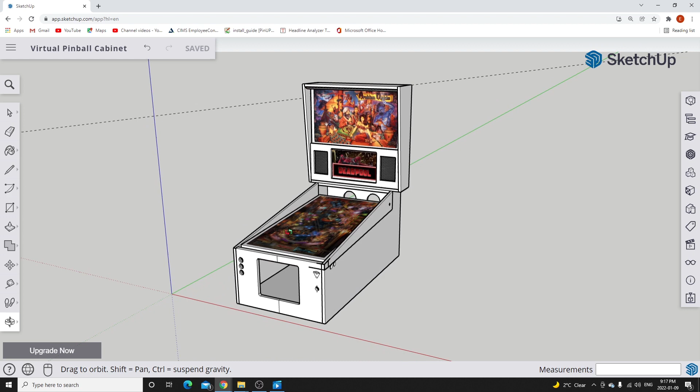Before I get into showing how to draw this stuff, I thought it would be important to talk about the design constraints you'll have for your own custom build. There's a lot you need to know before you even start drawing, such as how many monitors you'll have, whether you'll go with 3 or 2, a full DMD or a traditional 4:1 DMD, whether it'll look like a certain type of cabinet, standard, wide body, or custom like mine, and which parts you're using. Let's go through them one by one, then I'll show you how to draw some parts using SketchUp.

The very first thing you need to figure out is what type of cabinet you're going to make. Are you sticking to a traditional standard or wide body size Williams cabinet? If so, you'll have to search out monitors that fit those exact dimensions. A pro is that all the parts will be an exact fit since you've made it to the traditional dimensions the parts were designed for.

Now if you go with your own custom dimensions, like I did with my custom wide body, you aren't restricted by the monitors, but some parts still have to be a certain size, so keep that in mind. I went with a bigger, wider TV, which has pros and cons. One con is it makes my cabinet about 1 inch wider than it should be, so the wide body lockdown bars don't fit my design, and I'll have to make a custom one.

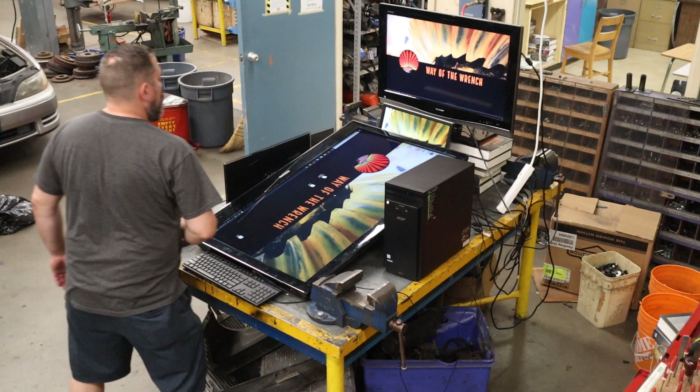Now once you figure out your TVs and you've got some TVs with good specs that you've already tested and they're going to work great for you, the next thing you need to do is figure out the actual dimensions of these monitors. In most cases these don't look great by just throwing the monitor in and being done. You kind of have to decase these things so they're a little bit skinnier, a little bit lighter as well, because some of these are pretty heavy.

So once you take them apart, get a tape measure and write down your length, height, and width. I'd measure from the front of the screen to the bottom where the VESA mounts are, so you know where you're going to have to mount stuff. You'll do that with all three monitors, and once you have those dimensions, you can draw a fake little monitor. It's basically just a big rectangle with some thickness, and that'll help you figure out how wide your cabinet needs to be and how long it needs to be, etc.

Now one of the things for the playfield monitor that's really going to affect some design stuff is whether you have a long enough monitor to fill in the playfield area. I know some people, especially when they're trying to stick to a standard size or a wide body cabinet, their limitations in the size of the monitor have reduced the length of it. So there's actually a bunch of inches here that they have to try to make up with something.

So what a lot of people do is they have kind of like a fake apron, which isn't the playfield and isn't the lock bar. It's just an area that you can kind of customize and do whatever you want.

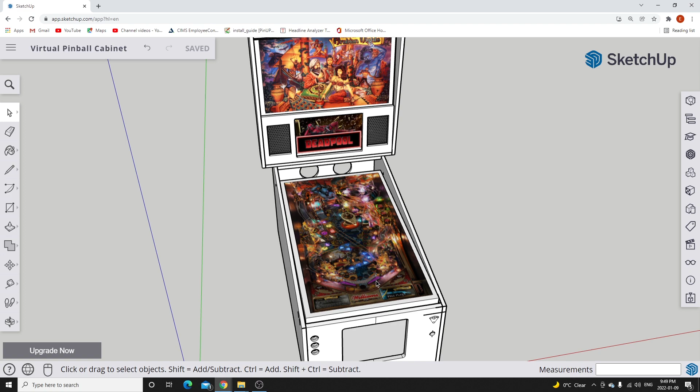But there is another kind of piece that's required to fill in the gap. One of the big reasons I chose my 46-inch TV is because of the length of it. I don't actually have to do an apron. I'm going to do a custom 3-inch wide lockdown bar that's going to cover up right to the edge of the monitor, so it'll be perfect. Literally from here to there is 3 inches, so it's going to mesh perfectly. If you look at the back here, it's pretty much where it needs to be, and there's room for a board for my LED matrix as well. That's going to work out perfect.

While you're at it, don't just get the external dimensions of your decased monitor. I would also try to get the dimensions of the actual display itself. Whether you plug it in and measure it that way, or you don't actually have to plug it in—if you look carefully, you can see where the edges of the actual display are and get those as well. That way in SketchUp, you can draw an additional box and insert an image, and it'll give you a better idea of what this will look like in your cabinet. So you can see on mine, I've got roughly an inch border around this monitor, which will help me figure out how it's going to sit with other boards.

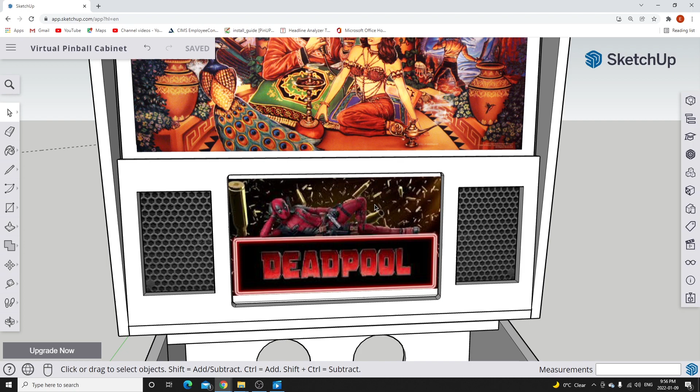Now, for your DMD screen, same thing. You're going to want to figure out what your cutout size is for your speaker panel. You don't really want blank black images where your border is on your screen, so you're going to want to measure the display size so your cutout looks more exact. And then on my Playfield, same thing—you can see there's roughly an inch border around this monitor. So keep that in mind, and that way when you put an image in, you can get a better view of what it will look like.

Now, for most of your dimensions, I'd say the front surface of your monitor to your VESA mount for your back glass and your DMD is going to be good enough for the boxed rectangle you're going to make in SketchUp. However, for your Playfield, I would get some more dimensions here, and I'm going to show you why.

So if I grab my monitor here and go to my move tool, I'm just going to move it by the corner, straight up and out of the way so I can see it with you. Now I've just moved the Playfield monitor up and out of the way so we can actually look at it from underneath. The reason why is I wanted to show what other dimensions you might need to know off of the actual Playfield monitor.

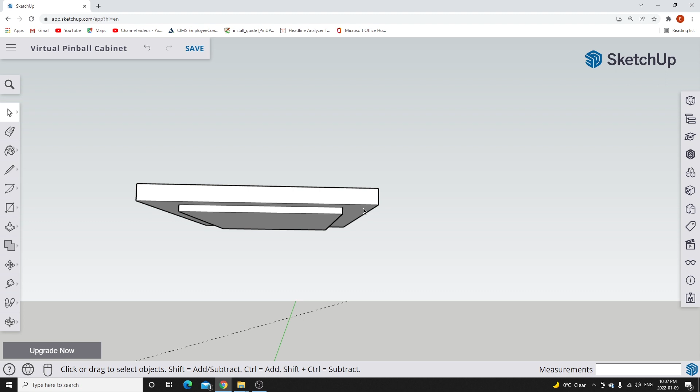Now what you're seeing here is a kind of boss that sticks out deeper. This dimension here is from the front of the monitor right to the VESA mount—this is where it's going to have to mount to something. But on my monitor, after I decased it, it was quite a lot thinner around the edges of the Playfield monitor. The reason I drew this into SketchUp is the next problem you'll have is the backside of the monitor, especially along the edges and by the front of the cabinet, taking up space where other parts are trying to be—your flipper buttons, your MagnaSave buttons, and your actual plunger. So I'd recommend you get these dimensions figured out on your real monitor so you can draw them accurately in SketchUp as well.

Now, it doesn't have to be super accurate—just measure all the way around the monitor and measure off the thickest part sticking out in these areas. The parts that are going to interfere with your monitor placement for your Playfield are your actual flipper buttons and your MagnaSave buttons, because on the inside of the cabinet you have those leaf switches and wiring, so that can't take up the same space. And on the front side of the cabinet, you have your plunger, which extends inside about 5 inches at an angle of about 5 degrees or so.

So you can't have the monitor in those spots. Now, there's a couple solutions to this. First, you could take the Playfield monitor and stick it all the way up at the top and keep it parallel with the top of the cabinet. I've seen a bunch of people do that. I'm not a fan of that, I kind of think it tends to make it look more like just a video game rather than a monitor. But if you do that, you will most likely clear all of these parts here and have no problems with the placement.

Now, when I designed mine, I did want to have it so that you had to look down through the glass and it looked like it was more in the right spot. So I was ultimately designing the top of the Playfield to be 1 inch down at the front and about 6 inches down at the back. However, that literally put it right in the middle of all of these parts, so that wasn't going to work for me. If this is your case, there are a couple things you could do.

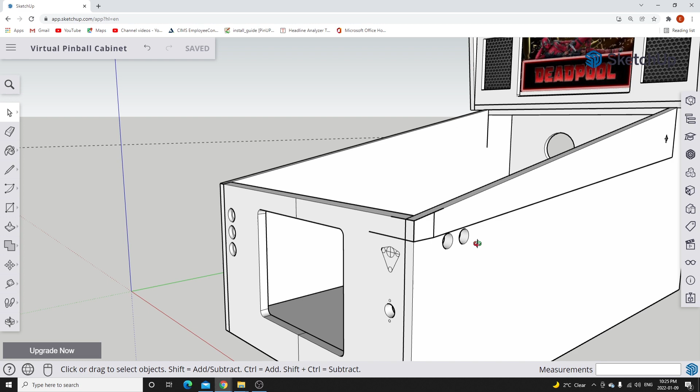However, in my case, I had no problem extending it down about 1/4 inch further. I measured with my hands over the edge of a table, much like it would be on the end of a cabinet, and it would actually work even better for my hands specifically. So I did move them down 1/4 inch, and that allowed me to modify the position of my Playfield monitor so it still kind of has the feel of what I was looking for, just a little bit different.

So what I ended up going with is the front of the Playfield monitor sitting right at the top of the cabinet at the front, and then the back is going to be 4 inches down. So I still get that realistic look with the glass and the Playfield screen being down a little bit, so it should look a lot better.

Now, what I did is I drew this temporarily with some lines on the outside of the cabinet so I could double check it was going to clear all my parts. So this dimension here is the thinner width of the TV, or thickness of the TV, which was 1.75 inches. So I drew the bottom of the monitor and then to where it would be at the back. And you can see that it is close.

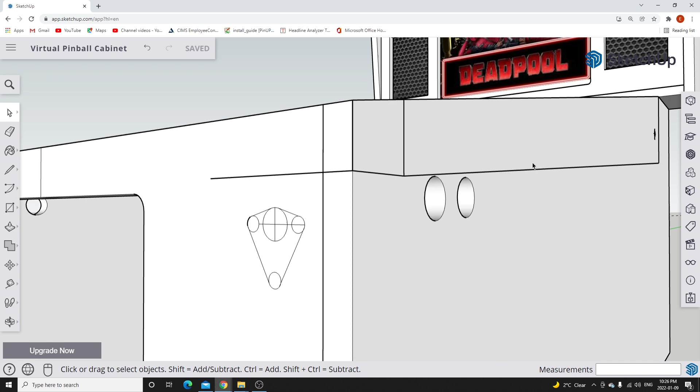But when I actually measured my parts with the backside and the nut and the leaf switches and stuff, I will be able to make this work for those flipper locations. And then I transferred the bottom, or furthest down section of the monitor, to the front of the cab so that I could double check. And you can see there's lots of room, so the plunger's not going to hit. So that's one way that you can lay out externally and make sure that nothing's going to hit with your monitor.

And if we look at from the inside for placement, all I did is I got my dimensions from the front of the cabinet where I wanted it, which is I believe 3 inches. There's my 1 inch down, so the bottom of the cabinet. And right here is where I'm placing the monitor.

So when I move the monitor back, grab the move tool or select tool, select the monitor, and I'm going to select the very top edge of the front of the monitor. And I'll back right out. And it sits right like that. So that right there to the front of the cab is 3 inches.

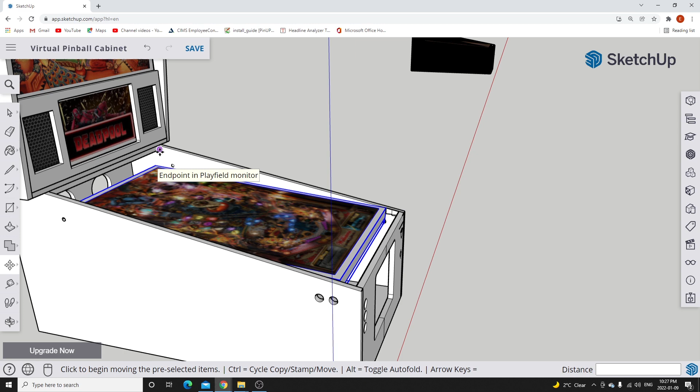Now you can see the angle there. So right at the top is flush at the front of the cab, and then it angles back to 4 inches from the top to the back. And like I said, I think that's going to give me that kind of realistic look where it's kind of angled back from the screen, the glass when it's installed.

Now, besides the external dimensions for your monitors for your design, you are also going to need your dimensions for all your other parts. Now, a lot of the parts, such as the front buttons on the cabinet, the plunger, the flipper buttons and MagnaSave buttons, coin door, things like that, they are all going to be pretty much the same dimensions that they would be on a stock part.

So if you are buying your parts from a pinball company or from Virtual Pin, they should exactly match and you should be able to just draw them up. But it doesn't hurt to just take some quick measurements and double check that everything is the same stuff before you design it and start cutting it out and find out you have the wrong sizes.

Some other things you're going to have to design are your speaker cutouts for your speaker panel. And this is a lot of more custom stuff. It depends on what kind of look you want to have and the shape and size of your speakers. Are they round? Are you using like a Logitech 2.1 setup like I am? So you're going to have to figure out what you're going to have to design for those speaker panels yourself.

For me, I have decided that I'm probably, because I have this big kind of rectangular shape to fill in, if I did circles, it might look kind of silly. So I've decided to go with these rectangular cutouts. And I actually found someone in the pinball community that has some 3D printed parts that you can make up that look exactly like the mesh on the new Stern cabinets, which I love the mesh look. It looks really quite cool.

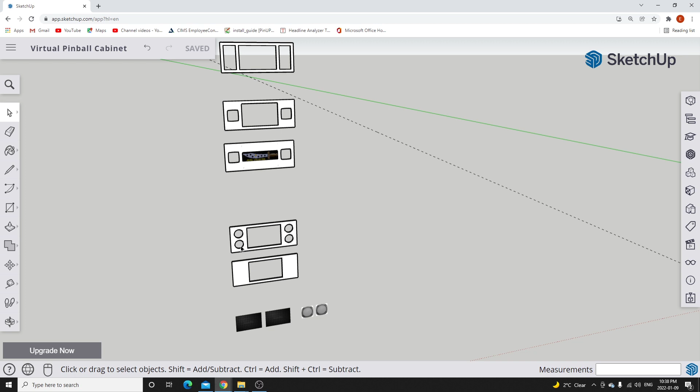And so you can see, because it's bigger than normal, I had more room than just one circle. And that would look kind of goofy in all that space. So I designed one with 2 cutouts. If you had 2 speakers, that would be probably pretty cool.

And then I played with the idea of doing the actual size of a traditional Williams cabinet speaker cutout, where it's kind of like a square hole, but these sides kind of have a large radius and then tighter radiuses in the corners. And that looks really, really nice too. But like I said, there's lots of empty space here that's not being used. And you can see an example of a more traditional 4:1 DMD cutout there as well.

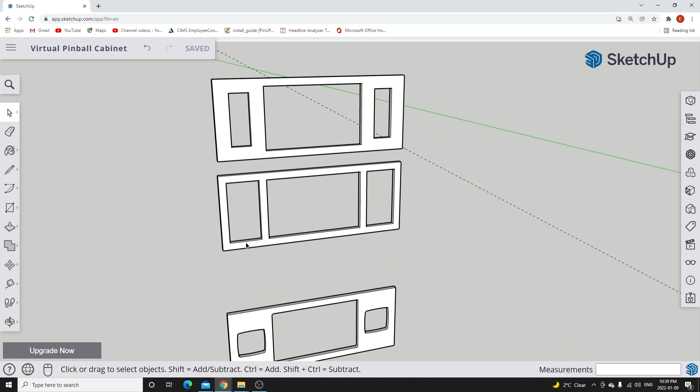And this one was playing with a little bit bigger kind of speaker holes. And then these ones up here, I've talked about this before when I was doing the arcade cabinet. Sometimes it's really important to design things with things being symmetrical. So for example, the space or border around the speaker holes, if you try playing with exact dimensions the same, so 1 inch all the way along, it looks a little bit more pleasing to the eye.

And this one I did a little bit bigger, so maybe 2 inches or so for the border. But you just kind of play around with these speaker designs and figure out one that you like. I liked these ones. However, I didn't like how this one was really thin - there's not a lot of strength to hold anything, so I decided not to do that one. And this one's not bad - I was leaning towards this one until I started looking at the Stern cutouts, which I liked a lot, so I went with that one instead.

And then you can look online and grab pictures of speaker mesh and speaker covers and things like that. You can just draw a rectangle and import that image, and that way you can mess around and add them onto your speaker panel and see what you like.

Now, besides having to adjust the width and height of the back box to fit these monitors and adjusting the width of this cabinet to fit this 46-inch playfield monitor, I have stuck to the exact dimensions for a wide-body Williams cabinet. And there's a couple reasons for that.

First one is if you start making something too custom and changing angles and dimensions, etc., you run the risk of this thing not looking right. The person looking at it who remembers what a pinball cabinet looked like back in the day, they'll sense that something's not right - it's looking too high, too wide, whatever it is. So that's one reason you want to stick close to the traditional stuff.

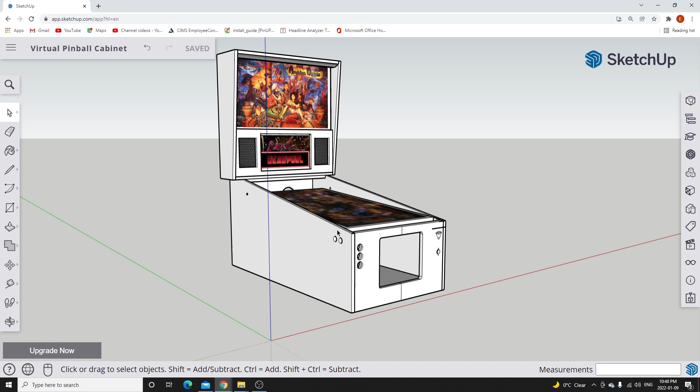And then the other one is you're going to want to furnish this with actual authentic parts - legs, lockdown bars, and stainless steel side rails. And because I have designed the sides of these parts exactly how they would be on an actual Williams cabinet, that means I can order the real parts and they will fit and look and work properly.

So you're going to want to look online for the dimensions. One of the best places I would recommend you go to is mjrnet.org. There's a bunch of stuff on here, everything from parts and software and boards and programs. But the big thing that I want you to know about is the guide - some would say this is the Bible of making virtual pinball cabinets, by Michael Roberts.

I can't recommend this more. There's everything that you'd need in here - you just hit on the table of contents. It's a great read through, including all of the dimensions and stuff that you're going to need. So you read through it, and by the time you're done, you're going to know exactly what you need to do. And there's all the dimensions you need as well for all the parts - for example, everything we need to know to design the sides of the cabinet.

One of the last things that we need to talk about before I show you how to draw some of the stuff up in SketchUp is how am I actually joining these panels together. So if you look at how I've done it, I'm just doing a simple butt joint here where this panel just butts right up against the side panel and they're going to get joined that way. Now, this is a pretty weak joint.

However, I am planning on backing this up with a minimum of a glue block on the back, similar to how I did the arcade cabinet - so if you're not sure what I'm talking about, check that out, and I'll put a link up top for that. I'm also thinking that I might actually throw in a couple pocket holes and screws to hold that before I even do the glue up blocks, so that this will be really quite strong.

Now, another thing I won't be adding that's usually on these pinball cabinets is this dado groove. I'm doing this in order to make it a little bit more simple for people to try to just do this at home. If they don't have a table saw or they don't have a dado set, you can opt out of this. You don't have to have it.

Now, the benefit of having these dado grooves is it kind of has some more edges to square things up and lock things in place. And when you glue and screw this in, you can see that there's actually some edge grain here on the top and bottom. So that's going to glue up a lot stronger, as well as you've got kind of a lip here to hold this in place and add some strength.

So if you do have a table saw and a dado set and you know how to do this, then I would recommend doing this - it would help your cabinet. But for my build, I am not going to do this dado groove, and I'm just going to use the glue up block, which is 1 inch wide. So we're going to have a bunch of edge grain to edge grain pieces here that when we glue and screw up, this could be quite strong anyway. So this is what it would look like on an original cabinet.

If you take a look at my build, you can see that I've moved this up about 1 inch. This area here is going to be filled in with a 1 inch glue block all the way around the bottom, and that's what this is going to glue and screw into. So we're going to have lots of strength, and there will still be a 1 inch gap in the underside of the cabinet, which will allow for any kind of underlighting, LED addressable strips, and things like that.

Now I'd like to show you some of the basic skills you need to know about so you can draw some stuff up in Google SketchUp. I want to stress that this is not going to be a 1.5 hour long video where I go step by step and make a complete cabinet with you. It'll be a lot of the same skills you'd see over and over. So I'm just going to show you the skills I think you need to know, and I think that's enough to get you going so you can try this on your own.

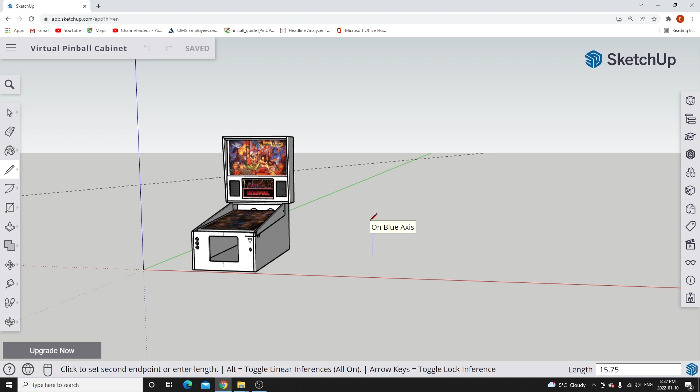The first thing you need to know is that you should try to draw on the axes—either the blue, green, or red—so you can figure out which lines are going to be 90 degrees to each other. It makes it a lot easier. So for example, I'm going to go straight up using the blue axis, and I know on my drawing it's 15 3/4 inches high, so 15.75, then press enter, and you'll see it drew the line at the length I specified. Now this is ready to continue. Because I'm drawing this side panel, I can actually rotate this so I can see what I'm doing a little better.

Now, because of the way I decided to draw this, the next part would be kind of at an angle. The angle isn't really specified in my dimensions, so I don't want to continue there—there are other ways we can handle that. So press escape, and I'm going to draw the bottom first. To connect, you can see that if I just hover over the end, it gives me an end point. You could also do a midpoint, but I want the end, so I'm going to left click.

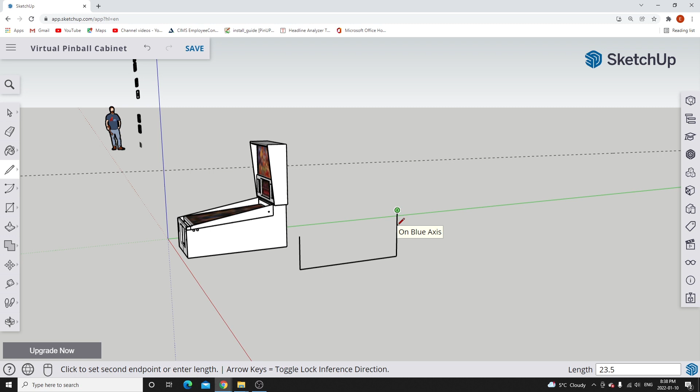Once again, I want to continue on a line I know is going to be parallel and 90 degrees to other things I draw, so I'm going to go along the green axis, and I want this one to be 51.5 inches long—so there it is. I'm just going to continue drawing, going back up on the blue axis. The back of the cab is 23.5 inches, and then there's the little top where your back box kind of comes out over here.

So we're back onto the green direction, and this one is 7.125, or 7 1/8. Then this angle is the only thing that's left, and we don't have to worry about the angle or the length or anything—we just have to go to the end and connect it. Now, as soon as you connect something in SketchUp, you're going to see it fill in like that.

All right, so now that we have this side panel done, it is not thick—it's just kind of a flat surface. So we want to add the thickness of the material we're using. Depending on what you're designing, you just design it to your thickness. Now for me, I'm using 3/4 inch plywood.

So I need to be able to extrude this out exactly 3/4 inch. What we do is go over to the push pull tool. Make sure you're on the push pull, and you're going to pick a surface. It doesn't matter which side, and it doesn't matter which way you go. So left click on it, extend it out this way, and in the distance I'm going to put 0.75, and you'll watch it snap to exactly 3/4 thick.

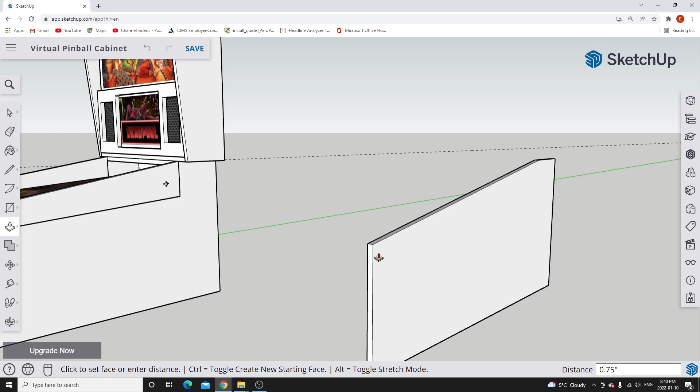Now we've simulated a piece of our plywood that's been cut up exactly to the dimensions for the side of the panel. Very cool. Now that we have this side panel done up, we've got to put some details in. So the next skill I want to show you is how to make a hole for our flippers and our magnet buttons. I don't know if there's an easier way to do this, but this is what I do, and I find it's pretty easy.

We're going to go line, and we know how to use that already. I've got my dimensions for where these flipper buttons are supposed to be. The first hole is 2 inches from this angled surface down, and 3.5 inches from the front of the cabinet. For me it's really easy - just go anywhere on this edge, left click on it, and drag it so that it's on the green line so that you're not off at an angle.

And then when you got that green line, let's go in that 3.5 inches. And then if we make the line go straight up on the blue axis and touch, not at an angle, but on the blue. Okay, and now we have the depth from the front of the cabinet, and now we just need to know from this point down 2 inches.

So we're going to press escape, click on the end point, make sure that you're drawing another line, and we're going to go on the blue, and this time we only want 2 inches down. Now it seems to kind of disappear or make it look like you didn't do anything, but if you keep hovering around here, you're going to find another green point, and it's calling it an end point. So from here to here, there's your 2 inches.

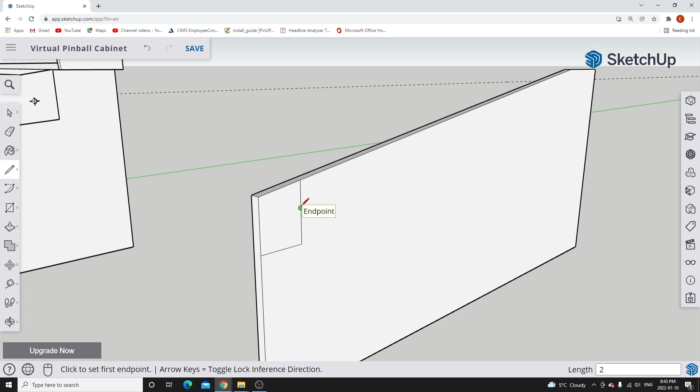And if you wanted to, just so you don't have to find it again, you could make yourself another little fake line. Let's just put it this way and press escape. And right there is where our flipper hole is for that one.

Now what we can do is also draw where the next MagnaSave button is going to be. So we'll do the same thing - go anywhere on the edge here, left click, drag it, make sure you're on the green line. This one is 5 5/16, so 5.3125. Press enter.

Same thing - we're going to go straight up on the blue axis like that, then press escape, left click on the end point there, make sure you're drawing a line, and go all the way down so you can see the blue line. This one is 2 inches down as well. So 2, enter, and then start at the top and go down, and where you see the green, that's where that MagnaSave hole is going to be. So once again, I'm going to make just a little line to reference where those holes are going to be.

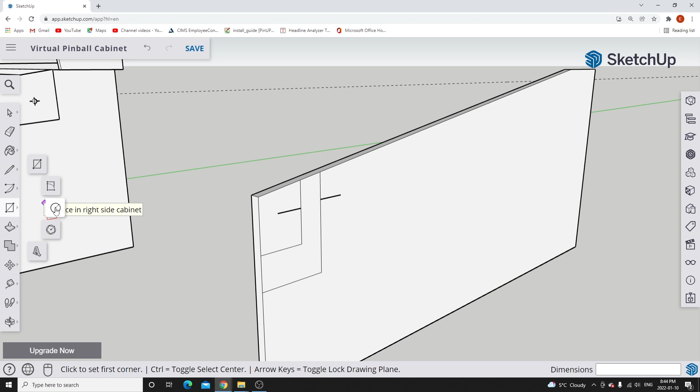Now that we have the position of these holes, we need to get another tool here. If you go over here and left click, you'll bring up all the different options of what you can make. Right now we want to make a hole or a circle. So left click on that and we want it right there. Then once you left click on the position of where you want it, you'll notice you can go out - that's got kind of a red, and you're specifying that it's on this face, but it doesn't have a radius yet. Now the hole for your flipper buttons is 1 1/8 diameter.

So that's 1.125. Put that in a calculator, divided by 2, and that's going to give you 0.562.

And there's that hole. While we're still on circle, we can do another one. We'll go right to the MagnaSave button, click the center point of where we want that circle, and type in 0.562 again. And there is our MagnaSave hole.

Now, what I do next is get rid of all these lines, because if I tried to extrude out this hole, you're going to end up with partial circles and stuff since these lines interrupt it. And we don't need these lines on here anymore. So all you do is use the select tool, select the line you want, and press the delete key. You just go around and do that with anything you want to get rid of.

Okay, there's that one cleaned up. That one cleaned up. Now all we have is the circles, and they're exactly in the position that we want. But once again, they're just circles on this surface.

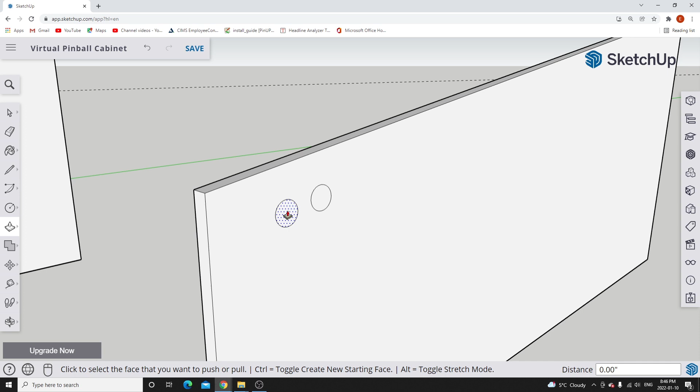So in order to have the representation of the hole going through the part, we're going to go back to our push-pull. Watch what you're selecting here. We want the hole in here, so left click on that. Once again, you can drag it out if you wanted to make a pin, but we want to make a hole. This can sometimes be a little sketchy, because you can enter the distance here after you go in the direction that you want.

What I find easier is I want that hole to go right to the other side and be flush with this face. You'll notice that if I click on this, it actually highlights that it's going to make it. So make sure you see it there, left click, and it looks like it went through. But if you want to check, you can just turn it from the front. And sure enough, there you go - you can see the green line going through the back. Okay, that's one of them.

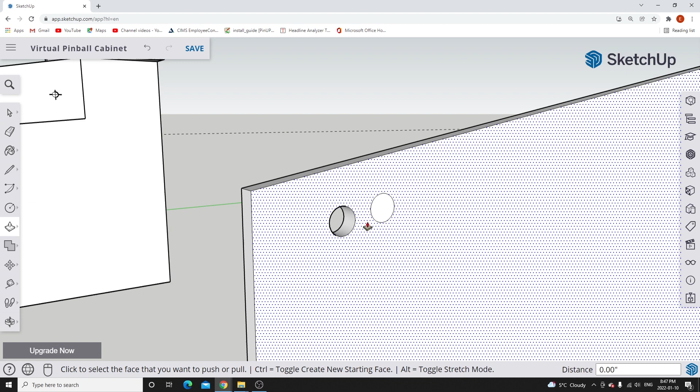So now we just do the other one - face, stick it through, make sure you see it on the face. And there we go. So that's how you can input any holes that you want to make on your panels, whether they're for flipper buttons, front cab buttons, screw holes, or anything else you need to make. So another skill added to the list.

The next thing I want to show you is how to copy a part. For example, in our case we have one side of the cabinet made and the other side is exactly the same. So we're going to select the entire part and go back to move. If you notice down here, it says control to cycle from copy, stamp, and move. Right now we are moving items, so we're just going to press control, and notice that it says copying now.

All you got to do is select one of these pieces and move it away. Once again, we can kind of keep it on the red axis so that the front is exactly level with the left and right here. And then just simply left click and drag.

Now you have a couple options here. If you do it the way I just showed you, you're going to end up with two panels that are unique - they're their own kind of pieces. If you want these things to be exactly symmetrical and just have the same part, you're going to want to make these things into a component first. Or you can do what I'm doing now and then just make each of them a separate component.

Now, I was worried later that when I was moving things around and labeling stuff they would get mixed up, so I just made them separate. I'm just going to drop this here and make two different components. All right, so there we got our two pieces here, and we can call this one the left and the right.

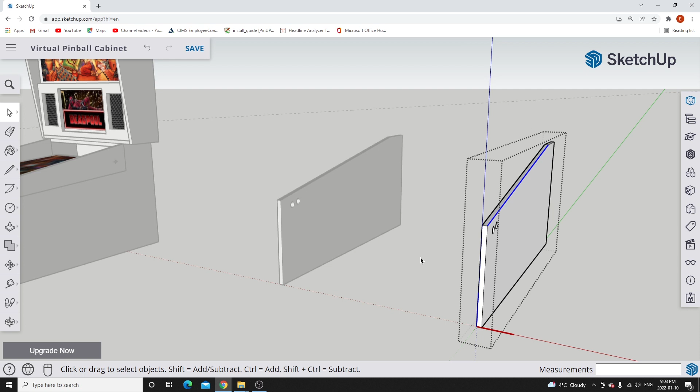So I've got a right side component. Let's make a left now. Left click, drag, select, right click, component, and we'll call this the left side cabinet. Once again, I have to call it another name because I already have one of those. Press OK.

All right, very cool. So we've got 2 different components, and we save some time by just copying and doing that. Now, if you do this another way, you'll notice that when you make a change on this part, it also changes the other part because you copied it and made a component first, which could be kind of a pain. So if you find that happening, select the part, right click on it, and say make unique, which won't be highlighted right now because it is its own unique component. But if these 2 were exactly the same component and you didn't want that, all you'd have to do is click make unique and it will separate the 2.

So let's draw another panel. Let's draw the front panel this time because there's a couple other things I can show you to get you going on your cabinet. Once again, we're going to go to the line tool and click anywhere you want, and in this case we're going to go up. It's the same dimension as the other, so 15.75 up.

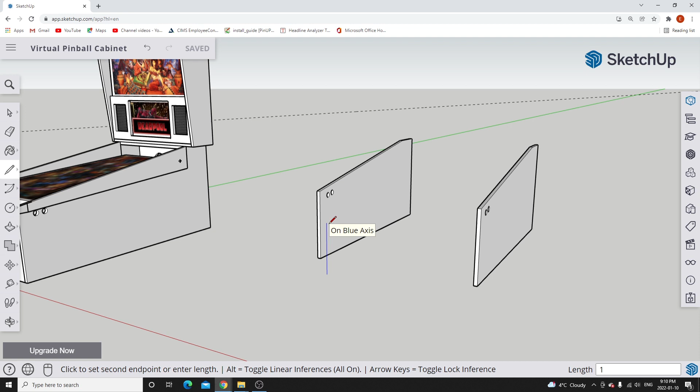Then we're going to go over on the red axis. For my custom width cabinet, my inner dimensions are 25 inches - that's what I need to clear my 46-inch monitor. So this one's going to be 25. Then we can go back down and punch in 15.75, or another trick to speed things up is if you hover for a bit when you drag it over, you'll see a dashed red line. Go until there's a blue line plus that dashed red line, and that is exactly from the other point, so you can drop that and simply go back and connect it.

If at any time you're not sure something went right, you can always double check it by measuring. So here's another skill for you: go over to the tape measure, left click, go to any corner you want, left click, and from there you can measure. This is supposed to be 15.75 high, which it is, and it's supposed to be 25 long. I can press escape and go from the other corner - 25, 15.75 - so I've double checked that this part is okay.

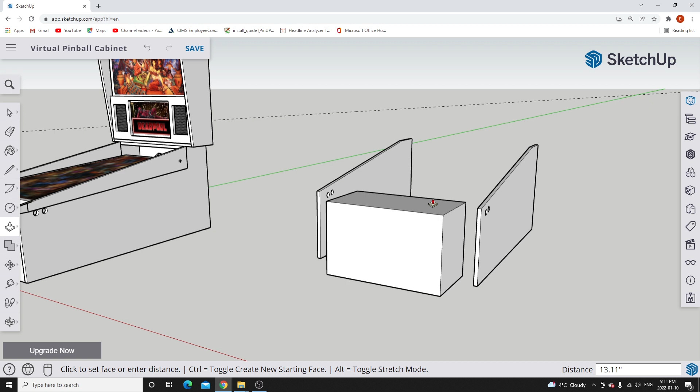Now, just like before, we want to add the thickness of the plywood. So left click on the face, we're going to go inwards and go 0.75. All right, so there's our front panel.

Now there's a bunch of stuff missing on this front panel, so let's start drawing that. The next thing we want to draw is the actual cutout for the coin door. Because it's basically just laying out a hole, it's going to be a very similar process for laying out the holes for your speakers or the holes for your DMD in your speaker panels. So I'm only going to show you the ones on here, and then you'll be able to figure out the others. The first thing we need to do is have a layout of where this is. The coin door is centered from left to right, so we have to have a center line. So let's go back to our line tool.

To change your view on something, you just hold down the third mouse button, or the scroll wheel. Once you hold it down, you'll get that green and red symbol, and wherever you're pointing on the screen will affect how you rotate it. You can see what other spots you're at.

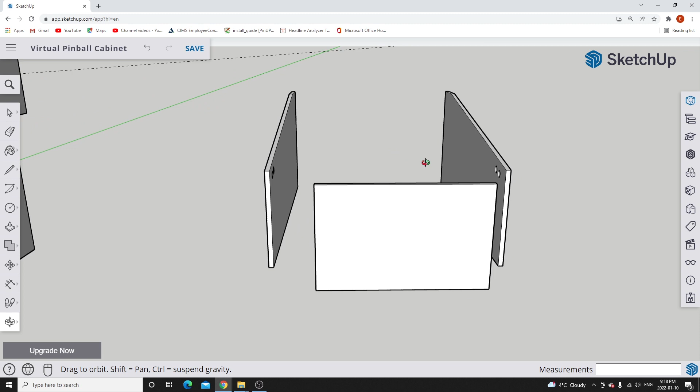To zoom in and zoom out, use the scroll wheel. Depending on where you place the mouse, it'll act differently. If I'm over here and scroll out, it kind of goes towards there. If I zoom in on something, it'll zoom in on where I'm focusing. So you just have to move your mouse around to get the viewpoint you want.

Back to finding our center line here. If you can see, if I go on the edge, when it gets to the midpoint, it highlights it as a midpoint, so that's exactly the center - I don't have to measure that. So I'm just going to make a center line to get this laid out to start. I'll go down like that, and then I don't want to continue drawing from there, so I'm just going to press escape.

Now on my drawing here, the top edge of that coin door hole is - I'm going to left click here from the top and go down. And that's kind of an oddball dimension: 1.71875. Okay, that will give us right there. So we're going to click on that.

And halfway over for the coin door - the coin door is supposed to be 12 1/4 wide, so we're going to halve that: 6.125, or 6 1/8. And then we're going to go down the full height of the hole, which is...

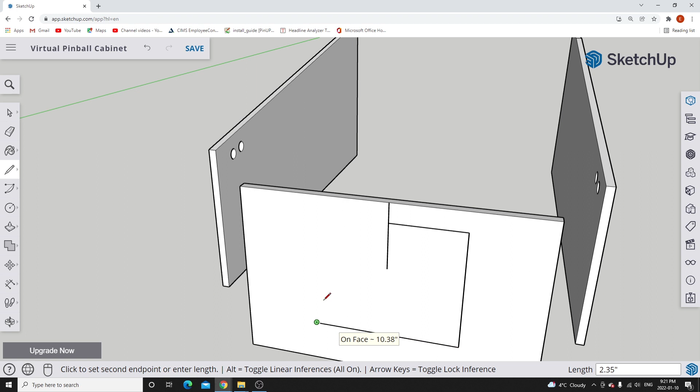10.375. And then we're going to go to the left, making sure we're on the red line. Now we're going to go the full width over: 12.25. Same trick - we hover over this and line it up, and just left click and left click. Now there is our coin door.

However, I do not recommend making it exactly square to the edges, because the coin doors are actually rounded. If you make that cut like that, you're going to end up with a hole sticking out past the coin door. So we're going to radius that off.

Now we don't need these lines anymore, so let's get rid of those first. Left click and highlight them blue, and delete. In order to get these corners radiused, this is what I do - you may have an easier way, but this is what I do.

I use the pen tool, go right to the corner, make sure I'm drawing a line, and go back down onto that edge. I want a 0.5 inch radius, so 0.5 - you can see there's the endpoint there. Go back up, left click on the corner, go on that line and go 0.5. Now you can see I've got two green endpoints there that are exactly 0.5.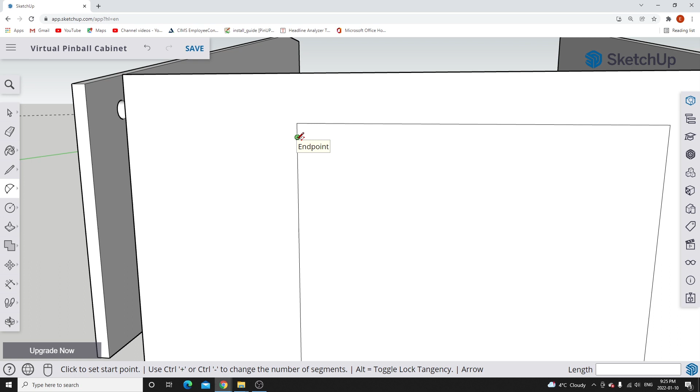Then what I do is go over here to 2-point arc, click on that, and it's asking for this endpoint here, and then there's the endpoint there. Then you just pick the one that looks good. So for me, I want it tangent at vertex. And there you go, there's my radius.

Now I don't want these ends in here, so I'm going to go back to the select tool, left click that, delete, left click that, delete, and there is your radius corner. Then I'm going to quickly do these so we can continue with the next part of this.

All right, perfect, so there is the cutout for the coin door. We just have to extrude this out, much like we did with our flipper button. So let's do that.

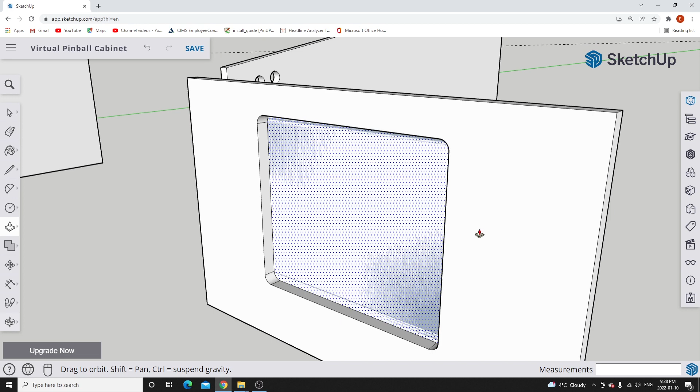Make sure you're selecting here. Same thing - easiest for me is I just flip it around and look at the back side. Select that surface, make sure you can see it kind of hashed out. And there we go.

Now we've got a perfect coin door cut out here. Awesome, coming along. Okay, next thing we have to do is add the buttons on the front control panel.

These are our enter the game, exit the game, extra ball, coins, etc. I'm only going to show you how to do one of them because it's basically rinse and repeat for the rest. I already showed you how to do a hole, but this one's a bit different because there are two holes. It's got a recess so the button can't stick out and accidentally get bumped by your leg and exit you out of a really good game. So it's much the same, but a little bit different.

So we're going to make another line again. We're going to go from the top, make sure you're on the top edge and on the blue line, and go 3 inches down and then just over to the edge. Then from that edge, in the plans it is 1.6875 inset from there. So that's where our hole is supposed to be.

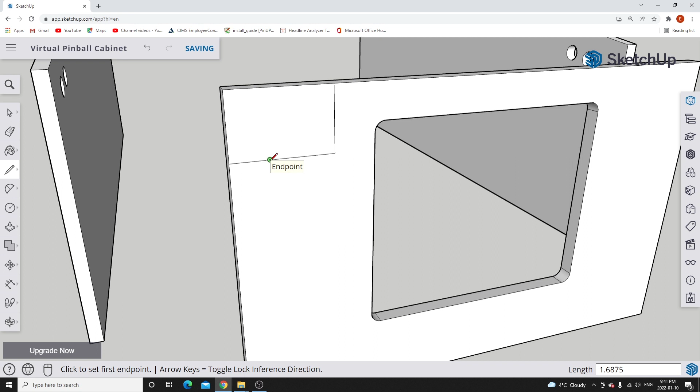Now we're back to our circle, and I'd recommend you start with the bigger hole, or the inset part, first. Left click, get it dragged out on that green plane. The radius on this is 0.6875. So there's our hole, and we're going to get rid of the lines now that we don't need them, so they don't interfere with our hole making.

Make sure you don't select the wrong thing. If, for example, you're trying to delete this and you accidentally deleted something else, don't stress out too much. You've got undo up here. Just click on that and it'll come back, and you can go back. Control Z is the same thing. Left click on that, press delete.

All right, now we're going to go back to our push-pull tool. Select the right thing, go in the direction that we want, and this one here is 3/8 deep, so 0.375. There we go. Now we have to lay out for the 1-inch hole that goes all the way through.

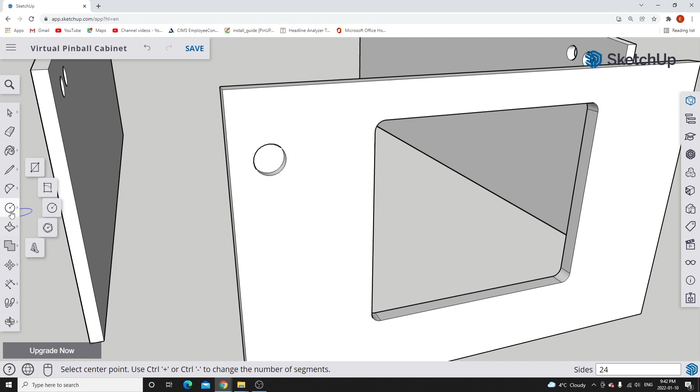Back to our circle tool, and I'm going to zoom in a little bit here. If you hover over the circle for a couple seconds, when you go back to the center, you'll find that it now recognizes it as a center point.

So left click, start dragging it out on the green plane, and it's a 1-inch hole, so we're going to go 0.5 radius. We can just twist this around in the viewpoint and see if it's centered, and it looks okay to me. Now we're back to our push-pull. Select the inside this time, and we're going to go all the way through to on face like that. Perfect, you can see the hole all the way through.

It's nice and centered, and there's that recess that we talked about so the buttons sit more flush with the surface rather than sticking out and getting bumped by your leg.

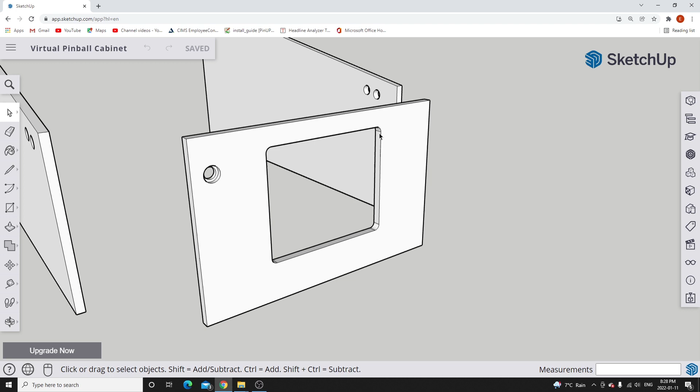The next thing you'll want to do on this front cabinet panel is add the details for your plunger and your launch button. I don't think there's any reason for me to do all of that with you—it's essentially the same skills I've been showing you, so it doesn't make sense to keep repeating them. But let's take a look at my other main cabinet, just to see what I'm talking about.

These dimensions and details, and where everything goes, you can find on the plans from mgrnet.org, so I highly recommend you go get those. You can see, if you look at it, we don't actually have to cut this entire thing out. If you leave it like this, you can grab dimensions off it really quick. But I believe this is a 3/4 inch diameter hole right here. So you'd basically lay out that point, that point, that point, that point, and then drill a 3/4 inch hole there.

And these ones are going to drill 3/8. Once those are all drilled out, you can take a saber saw and basically just cut along those lines. And if you need a reference, once you've drilled the holes, just take a ruler and a pencil, and you'll be able to cut those out. So I'm not going to show you how to do that—they're just circles with dimensions from mgrnet.org. Same thing with the launch button.

And like I said, we've already talked about, if you want to change those locations or switch the spots or whatever you need to, go ahead for your cabinet. Back to this demo cabinet here.

When we made this front panel, we actually forgot to make it a component. So let's quickly do that so I can show you the next thing I want to do with it. I just need to get a spot where I can select it without selecting anything else. There we go. Right click, make component. We'll call this front cabinet, and because I already have mine called front cabinet, I'll just make it number 2. Click OK. There we go.

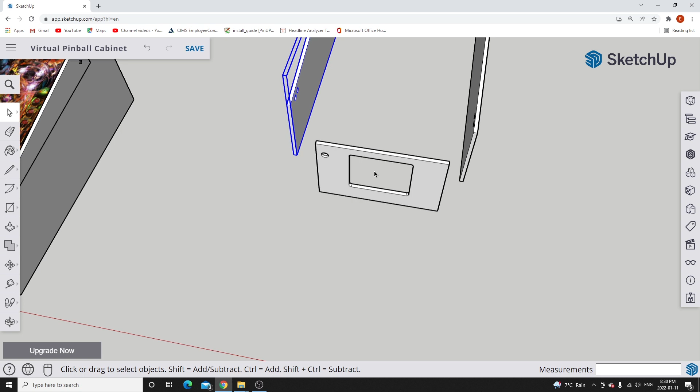So now it is its own component, and we can have no issues moving it. And so are these. All right, now the next thing I wanted to show you is roughly how, once you've drawn a component, you move it and put it together. That's a good skill to have for this.

So because in my design this is in between the two sides, what we're going to do is move this. We'll select this part, select the move tool, and this corner right here is supposed to be flush with that corner there. So I'm going to make sure I'm selecting the right corner. So right there. And then I can kind of rotate this around and make sure it sits right against that corner where I want it, and left click to drop that. Okay, there you go. That one's set in there perfect.

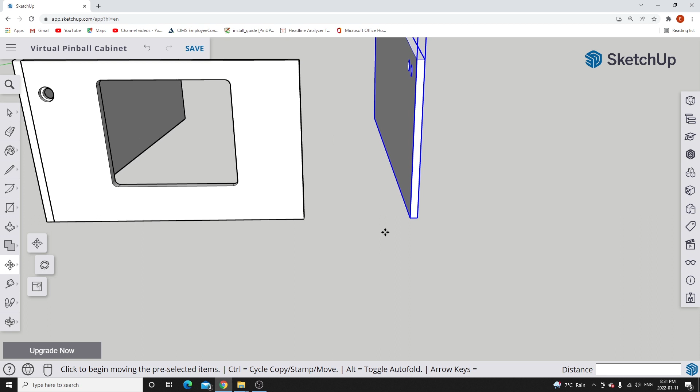So now we're going to do the same thing with this guy over here. Back to move. And I'm going to move it right to that edge. Feel free to zoom in too, that way you can actually see, and make sure you don't place it at the back by accident. So right at the front, left click to drop. Okay, so you're going to find that's really handy, that once you've drawn all these components, that's how you're going to mock up the cabinet and assemble it so you can see what it looks like.

Now, one of the main reasons I did this just now for you is so I can also show you something different here. So another skill is the fact that when I zoom in here, this piece is actually kind of flat, and this one's got whatever degree angle that is, 5 degrees, 10 degrees. And so there is kind of a gap here.

Now, I think technically, because you are going to cover this with a lockdown bar, you could just leave that. However, I want to show you another little skill here so that if in the future you want to make something that's exactly at that angle, you can do that. So I want to edit this piece, and more specifically this face or this edge.

So I have to double left click to get into this part, and then what I actually need to do is move this entire edge straight up so that it is flush with this angled edge here. So I'm going to select that edge, and then I'm going to move it. Because it's attached to everything else, it will move when I do this. So grab this edge here, and you can see simply by just going up, I can move it. Now you got to be careful because you're going to make sure where it's going.

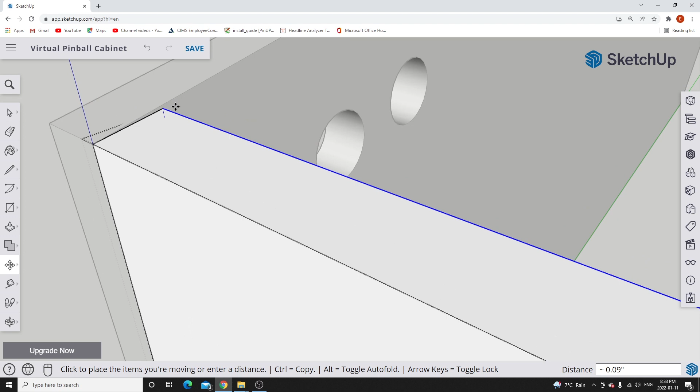However, now that I've said that, I can actually see what's going on here. It is set here as kind of like a swivel, so it doesn't really give you much options. So all you got to do is bring it right up to the top there, and now it links up onto the edge. So left click to drop it. And if we just get back out of the part, you can see now that that is completely flush. So this edge is now whatever angle this is.

Now, like I said, it might not actually need to be done, so when you're cutting this, you can just do that. However, if you are making something that needs to be flush with that and there's an angle, that's one way of doing it. Now, because this edge is higher, when you go to dimension this or figure out how you're going to have that cut, you're going to have to probably measure the tallest edge and cut to that dimension, so that way you got room to put that angle on it.

And you'll notice that on this side, because I lined it up with there, it's the same angle here, so it's all lined up. Okay, next skill that's going to come in handy for designing your cabinet is being able

to mock up a monitor and then actually get it to change angles. So to be able to rotate something in here so that you can actually see what it looks like at different angles and get what you're looking for.

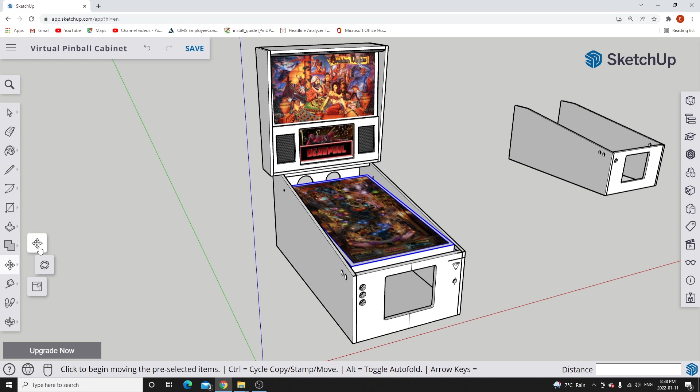So the first thing here, I'm going to just basically grab this monitor here. And for now, I'm going to move it up and out of the way. So I'm just going to grab the corner of it and just stay up on the blue line here. There it is, and pop it up and high out of the way so we can kind of zoom in and see what we're doing here.

All right, now for right now it looks a little complicated, but this is essentially just a big rectangle that has the dimensions of your decased monitor that you're going to use. And remember, we were looking at it already, so we put a little bit more details of where the VESA mount is and how thin the 2 or 3 inches around that monitor edge is for my case. So you've got those skills already.

What we need to know how to do is how to get an image on here. So whether you're trying to mock up some vinyl graphics on the side, or in this case, I wanted to just kind of have an image of a Playfield monitor or a back glass or a DMD. And so what I did is I measured the border around my monitor, which is roughly about 1 inch. And so then I just made another rectangle and put it right on top on that face. And then I inserted an image.

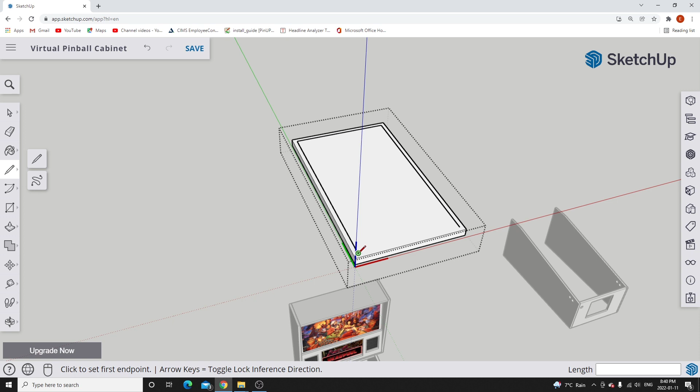So if I go into this a little bit, there we go. So if I just deleted the line, but I also deleted the photo here too, right? So all I'm going to do is basically just redo the line so I have a spot for where that image is going to lay.

Now, you have to go online and find an image that you want to put in here. So you can put anything you want, but find a popular game that you know and get a Playfield image for it. And then once you've saved it on your computer, you can go up here and we're going to go import. We're going to go import from this device.

And we're looking from this device. As you can see, we've got a bunch of images in here. And so this is the one that I used. And you can import it as a material or an image, but it doesn't need to be anything fancy. So we're just going to go image for today.

And you can see that where do you want to click and start putting it in. So I'm going to put the image right in the corner here. Okay, once you left click, it now asks you to basically drag it out to the size you want. And then when you're ready, you just do another left click.

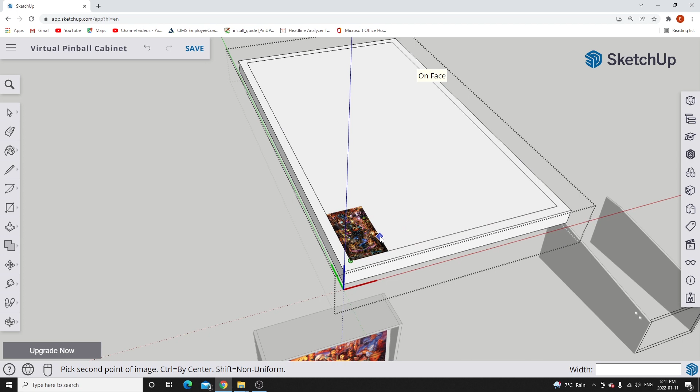Now the chances are of your image is not going to be perfectly matching. In this case it is. So I'm just going to left click, but you're just trying to get an idea of what it looks like too. So if it starts touching on the width, but there's still a little bit of a gap on the end, I wouldn't worry too much about that. If you're having trouble placing it, just scroll in.

All right, perfect. So now we have a bordered monitor with an image of what it might look like. All right, now the next thing is once you've built your mock monitor is laying it down into the cabinet and getting it at the right angle you need.

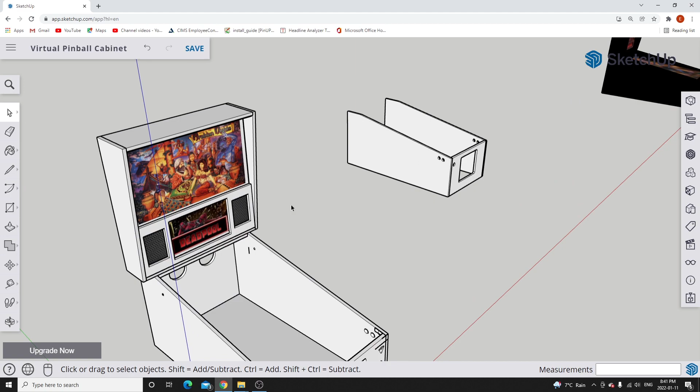And so what I did is I played around with some different dimensions and where I want it to be. For me, I'm going to make a 3-inch wide lockdown bar. So this line here is basically right at 3 inches. And then right here from here, I just made a temporary line that is 1 inch.

So you're going to make this to whatever dimensions you want, whatever depth you want the monitor to sit at. So the front is 1 inch down for me. And then on the back here, from this line to the top is 4 inches. Now it's not straight across.

So when you originally draw your monitor, it's going to be sitting on the green axis. It will be flat and straight like it is on the bottom of the cabinet. So you're going to have to rotate it down to get it into whatever position you want, or rotate it up. Let's go back to our monitor here.

Now we need to know how to rotate this part. So left click, I'm going to select that part. We're going to go to move, but you want this one here, which is rotate. Left click on that.

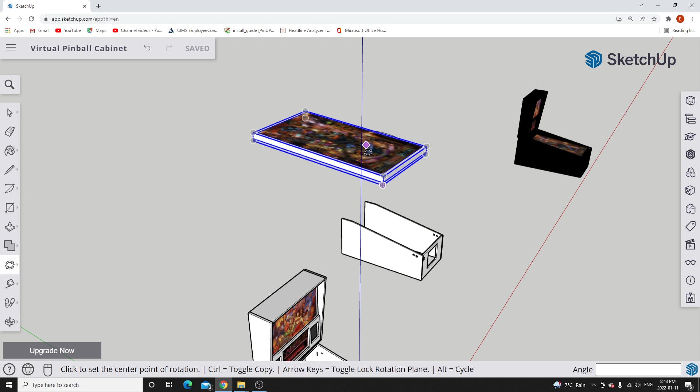Now, when you are placing your first left click, you have to pay attention to where the little protractor is angled at, and that is the plane you are planning on rotating it. So I don't want to rotate it that way, and I don't want to rotate it on the end. I want to rotate it on the edge, which in this case is turning red.

So I'm going to actually grab it from this side just because I put the lines on the other side of the cabinet. Make sure you got the red, and we are going to rotate it from that point. If you go right to the corner, it might start switching to something else, so just watch that it's still red and you get in the corner there.

So left click, and then it's asking you about a point of rotation that you're going to start rotating it from. You notice that this is fixed now, so we're basically just picking a line or a point that we're going to start the rotation from.

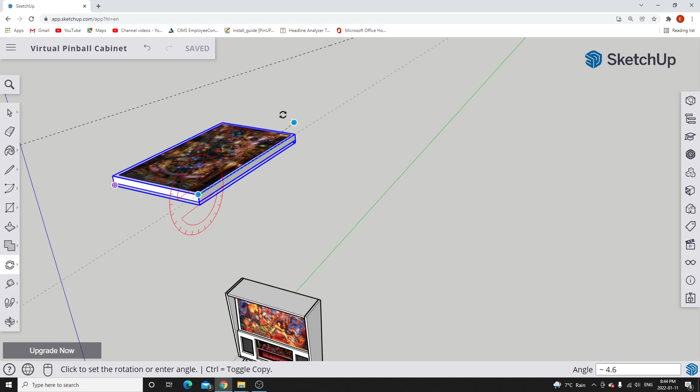So we're going to pick up here. And then once you left click, when you start moving the mouse, you'll notice that you are now rotating it from that plane we picked and using that point we've picked. So I'm just going to kind of change the angle down to something that would have been more where it was originally.

On the green axis. Yeah, that'll work. This is how it would have been drawn originally.

I'll just quickly bring this down to show you what I mean by what just happened. So let's move this from that corner. When you originally draw this and plop it in here, you're going to see it's probably not how you want it. This is just straight how you drew it, and so this is now sitting down quite far, 6-7 inches, and it is sitting flat in the cabinet.

Now, if that's what you want, great. But for me, I needed to angle it up a little bit more. So I'm just basically going to redo what I just showed you.

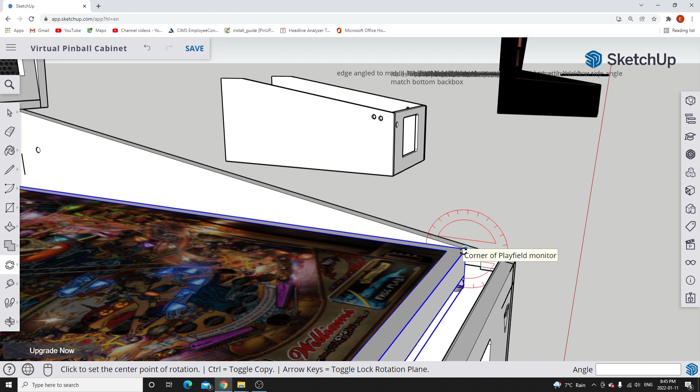Rotate. You got to grab that corner and make sure you get the red and that corner. Then I'm going to select the other end here. And then once again, there I've got my rotation.

So I'm going to line it up with the end of that point because that's where it is for me on my build, for 4 inches down. Left click, and there it is.

So that's how you're going to be able to rotate your playfield so you can get the angle you want, whether it's flush with the top here or whatever inset you decide.

So the skills I just showed you will give you enough to be able to build something like this. There's really no extra skills needed to get to this state. It's just more parts, more components, moving them into assembly into a cabinet.

You're going to make another couple monitors and insert an image so you can see what they look like. Some more cutouts, much like we did on the front coin door, some air vent holes, things like that. All of those dimensions and info is going to be in the mjrnet.org pinball guide. So working with that and the skills I just gave you, you can get something going like this.

Now, I thought to give you a little bit of a heads up that I would take this one apart piece by piece so you can see some things that are kind of hidden in here once it's all assembled. That way you have an idea for when you design yours. And then after, I will show you how to lay all these parts out on a sheet of plywood in SketchUp so you can figure out a cut plan as well.

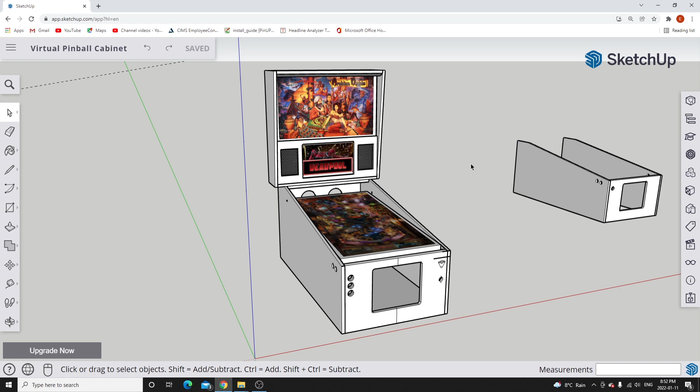So rather than me yank this part apart and maybe make an issue or an error for later, I'm going to select the whole entire thing. We're going to go move, I'm going to press Control, and we are going to make ourselves a whole brand new cabinet and just put it off to the side here so that we have lots of space.

Now let's take a look at some of the stuff that we're not going to draw. So there's a bottom cabinet. It's basically the same width as this and just reaches to the ends. You've got a back panel here.

We've got two big exhaust holes that we're going to put some computer fans in there, some 120 mil computer fans. And then I've got a cutout here so that I can put a hinge on it, so we can open it up and have some drawer slides built in so we can pull out the PC and do any maintenance we need to on that.

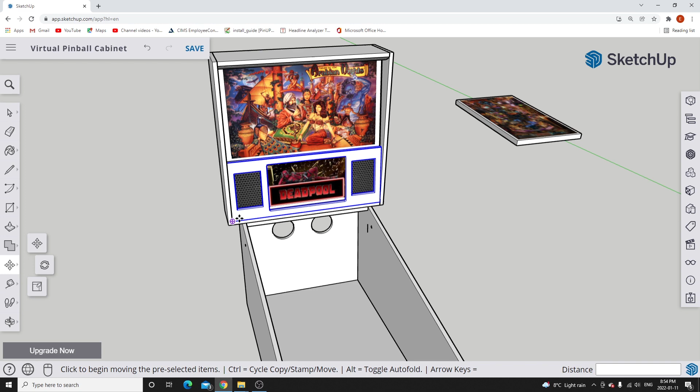Now, looking at the top here, let's start disassembling this a little bit. So we're going to select the speaker panel. Let's move it out of the way.

Now you can see the rough mock-up of the 19-inch monitor here, just sitting centered in here. And if you're having trouble centering things, there's a trick to it, and it's kind of hard to see sometimes. So I'm going to move one of these cosmetic panels out of the way. If I grab this guy right in here, we'll move him out.

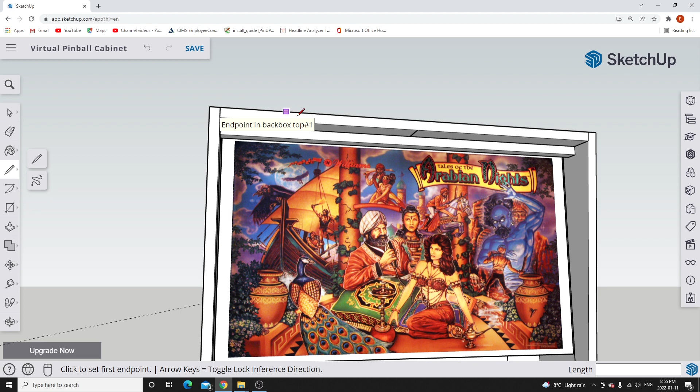Here's a little trick. If you're trying to center something that doesn't exactly fit perfectly, because I believe I put a 1/8 inch space on the sides of the monitor, what you can do is draw yourself a temporary line. Basically right in the midpoint, you start it and draw it to the back, and then you have a little line here, which is the center of your back box. Then when you install the monitor, put a little line there as well. You still can't see it because there's another part there too, part of the lock for the back box, so I just grab it and move it out of the way as well.

Right there is another endpoint line that I've drawn on the actual monitor so that I can line up the two. So basically you just grab this, and before you move it into the cabinet, make sure that you select the midpoint of the monitor, and then you can line it up with the midpoint or the line that you've just created, and that will perfectly center that.

Let's look at the back here. Now this is just a little rectangle that I added in a grill image that I downloaded to mess with what it would look like. That's the same as the monitors I've already shown you. So let's grab it and move it out.

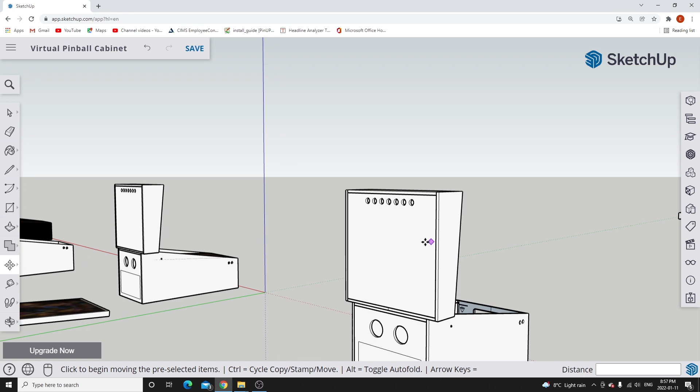Now I'm going to grab the back side here, let's take a look. Okay, so this back piece, you can see, same tricks. We're just putting some holes in for venting right at the top. I don't think I'll even need a fan up there - I think the heat will naturally rise, especially with the air moving inside the cabinet. And there's holes between the back box and the top of the cabinet, which you'll see in a sec.

So I'm actually planning on not having any kind of access to the back. But what I am going to do is put some blocks in the back that I will screw this into when the cabinet back box is done. That will allow me to unscrew this if I ever need access to the VESA mounts or anything like that, to change a monitor, but I won't glue it in. And because there's no hinge or big openings, this should add a whole bunch of stability and rigidity to the back box. So that's the plan for that. Okay, let's move this one out of the way now.

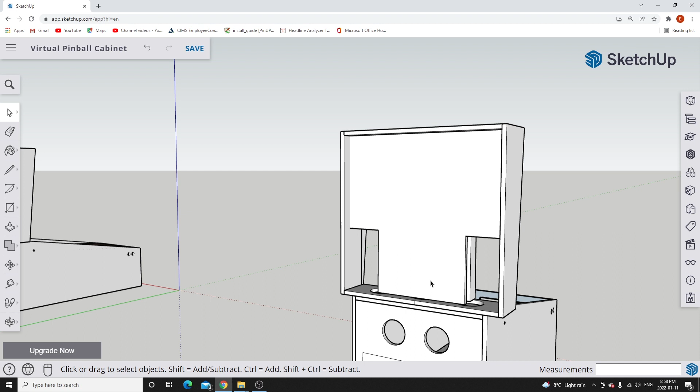All right, in my plans so far, I have a piece of 3/4 inch plywood that's acting like a big massive VESA mount board, which will attach to the sides, top, and bottom, probably with blocks of wood screwed into it, or maybe pocket holes, or even brackets. I haven't decided fully. But looking at this, it's crazy overkill.

At a minimum, I'm going to lighten this up with a bunch of holes, even just for venting so the monitors can breathe, but that should also lighten it. You don't even need to make this board at all - you could make some up and down and horizontal braces to the VESA mounts. I was even thinking about welding something out of angle irons to be more sturdy, but this will definitely be solid enough.

Once I look at the monitors and when they're installed, I'll figure out where I want the venting so this is lighter, yet still strong enough to support. Okay, I'm going to take this guy and move it out so you can see what's around it.

Okay, these are the back of the monitors here. In my case, I'll also have to make some kind of block or adjuster because they're not flush on the back. I made them more flush on the top, on the front, so I'll just have to put something in to space out whatever the difference is.

Now, one thing you may want to change in your design is typically there is a big slot in the bottom of the back box and in the top piece of the cabinet, and that's to allow wires to go through, for heating and cooling, as well as if you decide to take this monitor and turn it 90 degrees, you now have a slot you can put down into the cabinet, which can make this space a lot skinnier and give you the more traditional 4:1 DMD ratio, yet you're using a big, cheaper monitor.

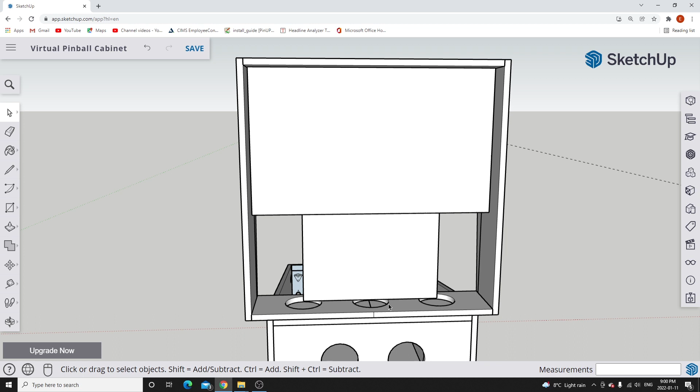So if I grab this one, I can show you what I mean. You can see underneath, I haven't transferred the holes. I'm just going to lay it out on the top and then basically transfer those in when I go to make the cabinet.

Right, and there's another one of those little lines I was talking about to help you center things. I probably used it for centering this monitor. Oh, actually this one I used for centering the entire back box. As I was drawing and making these parts, I made the back box separate, and then I moved the whole thing and centered it on this cabinet with that line. So that's all that line's for.

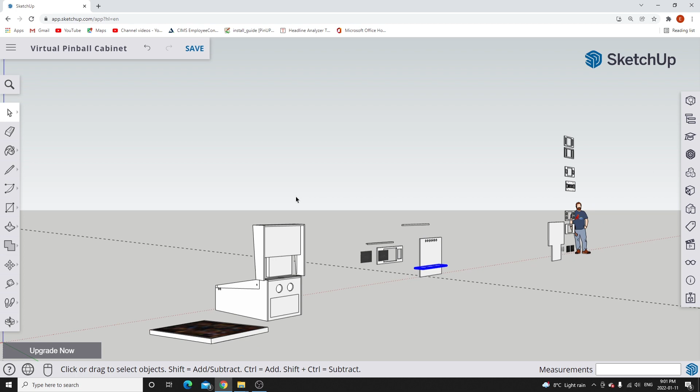Now that I've deconstructed this, you can see there's no real new skills - it's everything I've shown you already. So I didn't want to show you step by step for the entire cabinet, because I think the best thing is you need to just get some basic skills and then start messing around with this, and it all kind of comes together.

Okay, you can see some other lines in here that help me transfer where I want to have monitors placed. And then other than that, that's about it to this cabinet.

So now that we know how to make this cabinet, the next skill you're going to want to know is how to take all of these individual pieces and lay them out on a mock sheet of plywood so you can figure out what your cut plan is going to be. Much like I just showed you grabbing the individual parts and moving them off, you're going to do that to your cabinet, and then we just have to mock up a sheet of plywood. So over to the side here.

Anywhere you really feel like it. It's kind of a cool thing about SketchUp. We are going to make a mock sheet of plywood. So back to your line tool.

Okay, we're going to left click here, go back out on the green axis, and we're going to make this the long side of the plywood. So a normal sheet of plywood is 4 foot by 8 feet. So if I put 8, it's going to assume that's inches. So I'm going to add a little quotation so that it knows it's 8 feet. Press enter and let it continue here.

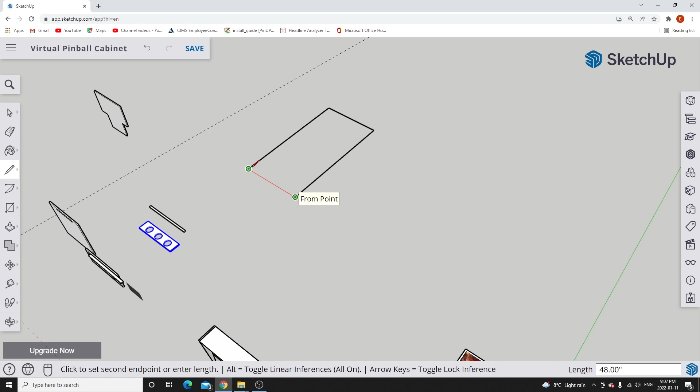We're going to go on the red axis now, so it's 90 degrees from there. We're going to add 4 feet. And then we can just match it up with this so that we end up with the right side. There we go. Left click, and there is our little sheet of plywood.

So now that you've got your rough 4 by 8 foot piece of plywood here, all you're going to do is take these individual pieces, grab them and move them over here and start laying them out in different kind of patterns and see what works best so that you don't have a lot of waste and you can fit and maximize the pieces in here. Now, you can put them anywhere you want and just try to get it to fit as tight as possible.

That is one way of doing this, but you may want to have a little thought about if there's a bunch of pieces that have the same width of cut, you may want to try to lay those all out so that you can have one long cut on a circular saw or a table saw. So that's just one thing to think about.

So I'll show you just a couple things here and then I'll show you what I ended up doing. Another suggestion is you don't really want to start just throwing all your little stuff in - grab the biggest pieces you have first. So for example, this side here, we should get that moved out.

So once again, I'm only going to show you 1 or 2 pieces here. We don't need to do absolutely everything. Okay, so we're going to move it. Let's just move it away from the cabinet for starters here.

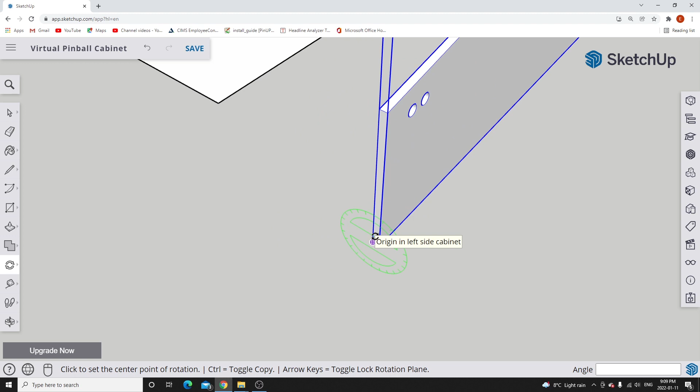Now, problem is we got to lay this down. And like I said, you already got the skills here. So we are going to go to move and we're going to rotate this, and we want it to be that green axis or plane. So we can left click there on that corner, go up to the other end here, and we can rotate that down so it's on the same plane as the plywood, which is the red axis. So left click.

And now we can move this so that it is positioned on the piece. So back to move - if we wanted this corner to be right there on that corner, then that's where we're going to put it. So you can zoom in to make sure you get the top - not the top, otherwise it'll sink to the bottom, so we want the bottom. And then go right to that corner and plop it on there.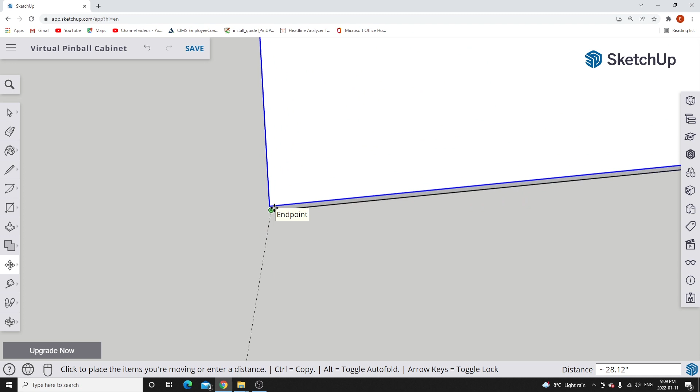Now, if you are doing this, you have to make sure that you are using the edges of the plywood, because if you have to take kind of a trim to make it square before you start, then you're going to lose that material. So just be aware of that.

Now, another trick here to laying out parts and minimizing waste is if this was perfectly rectangular, then you wouldn't have to worry about this kind of wasted space, right? If we just cut this off, this is technically a big piece of waste.

However, because we are making the other cabinet side and it has the same angle, we could take the other cabinet side and put it here and rotate it around so that the angle matches, and then that's not wasted anymore. So let's grab the other one, because that's about the hardest thing to figure out on this guy.

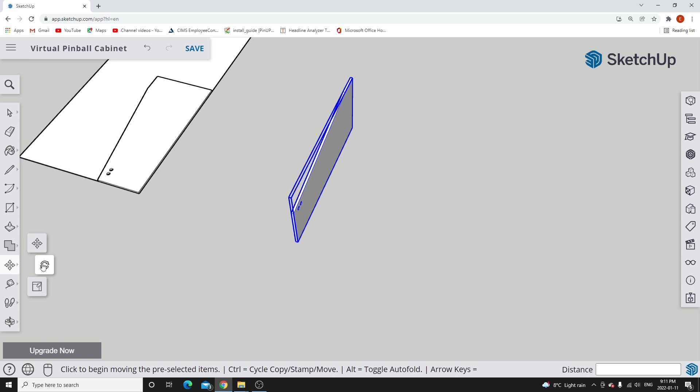So grab that side. Once again, let's move it out from the part. Okay, and we're going to rotate it back down again, so back on the green axis.

Lay it down on the other corner, on the red axis. All right, now we need this to rotate around 180 degrees.

We're staying on this plane this time, so now we want it to be the blue axis. We'll stick it on the corner there. Doesn't really matter which end you grab the other one from. Left click there, and then now when I move the mouse, you can see that I'm rotating this way.

So let's go with the green axis. Now that I got this side of the cabinet flipped over and angled the right way so that these angles will match and there'll be less waste, the next problem is if I just move this over and line up those angles, when I go to make a cut, these parts are going to be short because I'm cutting with the thickness of the blade, or the kerf.

So I do have to decide what kind of clearance I have between all the parts that I'm laying out here, and I would not make it the exact thickness of your blade - that's kind of asking for trouble. So what I'm going to do is leave 1/2 inch between all the stuff. Now, because this part's got an angle, it's a little bit trickier than the rest. Otherwise, it's easy to leave 1/2 inch spaces.

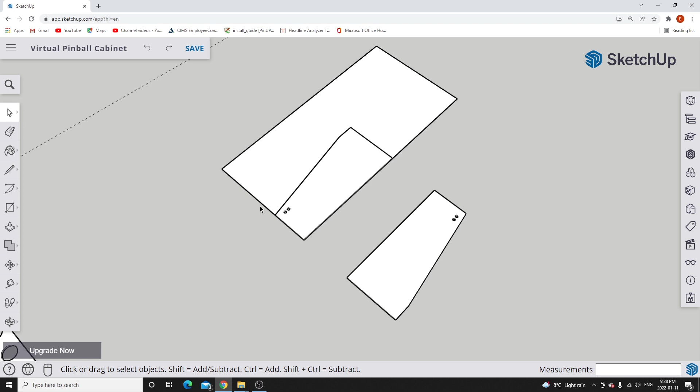So I'll show you how I do this. Go back to your line tool. On this corner, go from there and go along that line, and we're going to add 0.5. Okay, so that's it there. And then we're going to go up to this corner, and on that red line, on the face, 0.5. Okay, and from there we can just kind of go back and connect the two.

So this line is just a line to represent the spacing between the parts. Now that we have that, we can go back to the select tool. We'll grab this guy, and we're going to move. And this one's a little tricky because you've got some different spots to line up here.

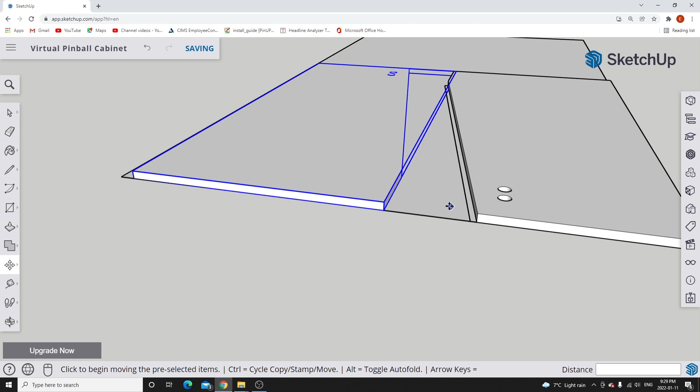So what I would recommend is you grab this corner on the bottom side, and the very first thing I would do is make sure that it is just sitting on the face - so just left click on it like that. And then you're going to do a second move, on this guy right here, and now it'll stay on the face as long as you kind of just leave it on that red line. And then now it's on that edge. Left click, and let's click it off, and then you can see.

So there we go. You can see there's that 1/2 inch gap between the parts so that we'll be able to get the room, yet we're not wasting all these pieces twice on the board.

Now, there's no sense in me showing you with every single part here. Basically, just start with the biggest stuff, start laying it out, and if you find it's not big enough, then you're gonna have to move it or go to another piece of plywood. You just kind of mess around back and forth and see what is going to work, and obviously it uses the least amount of wood.

Now, because I'm making a slightly bigger wide body cabinet, I was not able to get it all on one sheet of plywood, so I ended up needing 2. So let me show you what my cut plan looks like.

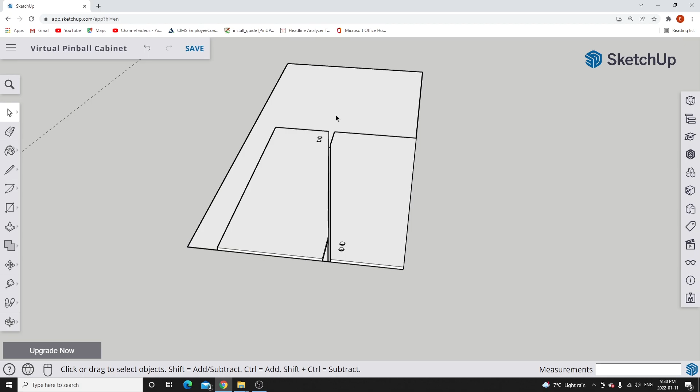So you can see I've laid out all my parts here, and I really did try to maximize the use of the wood. But I've got everything laid out here, and can quickly kind of start planning all my cuts with something like this. I can literally print this out and take it out with me, and I can decide that, okay, well, I'm going to take a cut here with a circular saw and get these 2 lengths done.

And then I can cut this strip here and get this piece off. I can cut that strip off and get that piece off, and then you've got an idea of how you're going to cut this out and the order of cuts so that you don't end up cutting across another part. So this is super, super handy, and you could spend a lot of time just kind of maximizing the space rather than just wasting and having to get yet another 3rd sheet of plywood just to get this to happen.

So now that you got your cut plans, the last thing we got to do is have some dimensions that we can actually kind of print off and take into the shop and start laying this out. So let's focus down in on this part here, and let's dimension this piece here so that we know how to make it. So dimension, left click on that.

Let's rotate it here just so we can see a little bit easier. We're going to go from there to the other end there, and you can place it in different spots. I would not get into the habit of putting dimensions over a part like that. They usually always come off the part.

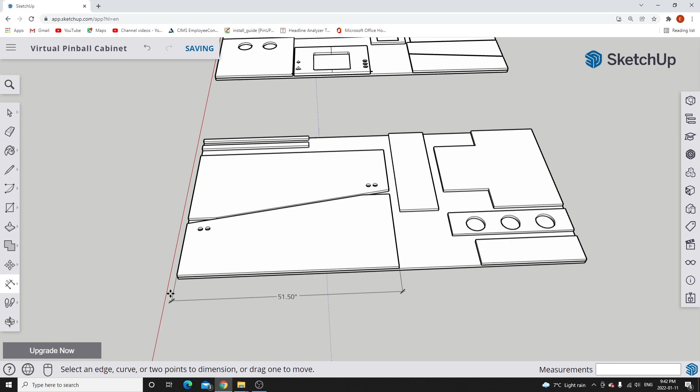That way they look a little neater and more organized. Okay, that's that side. Let's do this one. Okay, 15 3/4. Okay, this guy here.

Now, you may want to do these parts individually off the cut list so that you can actually see what you're doing a little better. But really, this is just up to you how you want to lay this out. So in this case, you may want to put it over the part because we're overlapping on other parts. It's really up to you. In this case, I'll just put it right over the part.

And we got one more up here that we got to dimension. So that corner to that corner. There you go. So now we've got all the external dimensions to be able to lay this out.

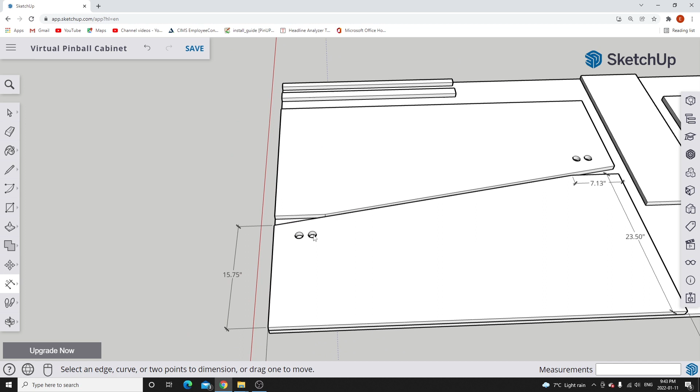The only other thing we didn't do, which I could show you for any kind of radiuses or diameters, is to label this guy. Now, if you just do dimension, you'll notice that nothing gets selected to pop up. If that's the case, then you got to double left click into the part. That way you can actually access the circle. So double left click, now you can access the circle.

So we're going to go back to dimension. And for things like circles and radiuses, all you got to do is hover till you see the circle, left click, and when you pull it off, you'll see that it adds the required measurement. So diameter, 1.25 inches. Okay, and that's going to be the same one. Now, as for placement of where that hole needs to be drilled, we can get those dimensions as well.

Now, something that's a little bit goofy here is that I can't actually get the center of this circle without getting it measuring and snapping to the top edge here. So a little workaround is just grab a pen tool and grab a temporary line. Now remember, this isn't your actual part, it's just your dimensioning part.

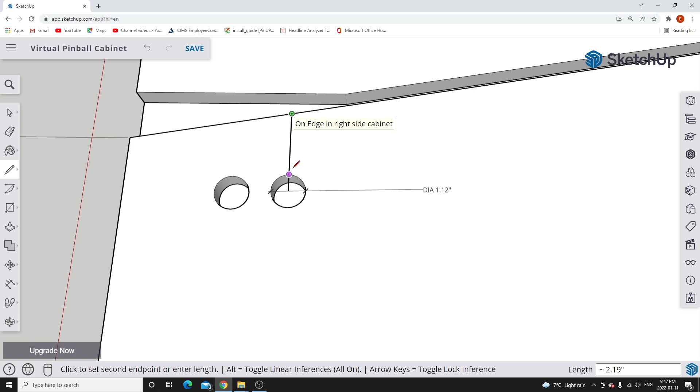So we want the center, so we're going to hover over the radius or the diameter of the circle, which will let us get the center. Left click, and now we've got our snap points, so that red line, and we can snap it right to that edge. Okay, and you can do the same for over here. Okay, now we can dimension that.

So right from there to the end point, drag it to the side so we can see what that is. So 2.75. Do the same on this one. And there you go. There's the dimensions for X and Y for where we're going to lay this out and drill those holes. And it'll be exactly the same for this hole, just different dimensions.

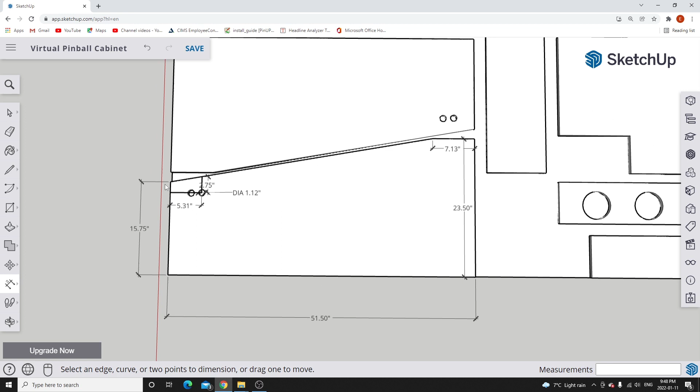So once you have these all laid out, you can now zoom out, get a nice straight up and down shot on it. Make sure you can see all the dimensions you need to. And some of these you may have to do another zoom in on. So for example, that detail you might zoom in and print it off like that. And this one here just kind of centered a bit.

And remember, you can move these in the dimension tool. You can just select it and then move it in a little bit so that things are not so far out. Okay, and then once you can see all the dimensions and everything you need, and you want to print this off, then what you're going to do is you're going to go up to here.

And because it's the free version, we got some workarounds here. But what I usually do is go download, and we just want a picture. So let's download a picture of this. Okay, it gives you a little preview of what that's going to look like. And then you can export it as a PNG. Okay, it's going to give you a warning. That's not a big deal.

And there we go, it's in my download already. So I can use that, print it off, and take it out into the shop. We just have to do this with all the parts.

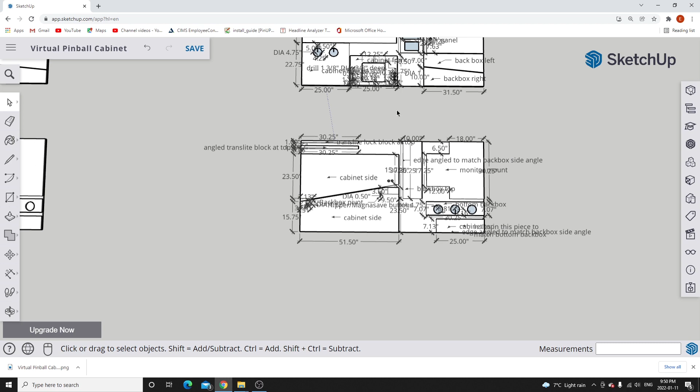So if we take a look at what I did for my cabinet, you can see with SketchUp it looks like a horrible mess here, but as you zoom in on it, it all kind of scales in and spaces out so you can see what you're doing. So for example, there's mine here, got all the dimensions I need.

And so what I've done for you guys, if you don't want to do any of this and just want to make my cabinet the way it's designed, I've zoomed in already and saved a bunch of PNG files so that you can really just print them all off, take them into the shop and start laying it out.

And any of these parts that are a little bit more complex and need a little bit more detail, like for example the hole locations for the pinball buttons or for where the plunger is going to be, I've done a zoomed in view so that you can actually see those dimensions as opposed to just seeing a big horrid mess like that.

So another thing you may want to know is how to change the color of your parts so you can really get closer to what your cabinet's going to look like. The stock color that SketchUp uses is white with black edging, but if you're going to be painting this thing black or yellow or green, it'd be nice to see what it looks like.

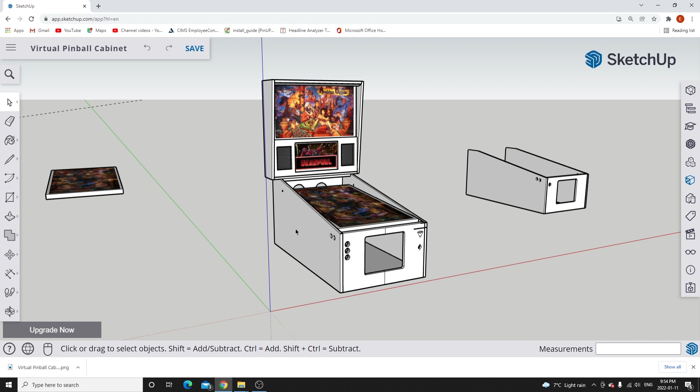So if you want to do that, what you do is select the surface, go over to paint. That's going to bring up a whole bunch of stuff here. Now you've got your base colors. You can also import anything you want, whether it's speaker meshes or pictures or anything like that.

And once you select it, let's say I want it this color here, you can just go inside on the face and click on it and it will change the color from the stock white to whatever you picked. So you can pretty quickly go through a cabinet and start seeing what it would look like in the color scheme you're thinking about.

So if you're going to try to make a Simpsons cabinet or Ghostbusters or whatever you're doing, you can kind of quickly change stuff. Or you could start figuring out what a two-tone would look like.

Maybe you want black on the sides and any of the kind of trim pieces. Black out some of the stuff that you wouldn't see for your monitor, and you get a really good view of what this thing is going to look like.

So I thought that would be very useful for you guys in case you wanted to change that. And to give you an idea, this is kind of what I am going for. I'm going to end up going with kind of like a black look to it, and this would look great, letting all the artwork do the talking and make it look like its own individual cabinet.

This really doesn't even almost need vinyl graphics. However, I still think I'm going to be doing vinyl graphics on this build, but the base paint is going to be black. So this will be kind of what it looks like at some version in the near future.

All right, that's a wrap on another video from Way of the Wrench, this time on how to design your very own virtual pinball cabinet using the free online SketchUp program. Hopefully with the tips and tricks and basic skills that I gave you, you should be able to make your very own custom design.